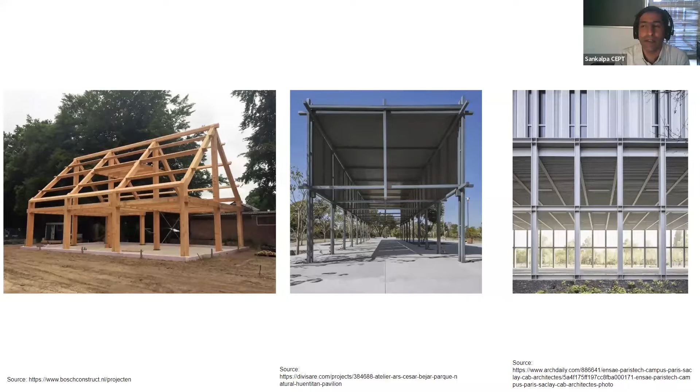The first case, of course, you can see. The second and third case is an articulation of a similar system. It is sort of an orthogonal form, but the way it is articulated is slightly different. So if you look at the one in between, the way it is treated is almost like how timber was treated earlier. And the right side is where profile sections in steel are used, one of the better ways in which profile sections are used. I've put the left one so you can compare it with the in-between box section.

So you see that there is some way that there is an intermixing of knowledge which is continuous. It is not that bamboo has not been used since ages, it has been used since ages. Some of the ways in which bamboo has been used, timber got into that, and then from timber it got into steel.

So I would say that it is an intermixing of things, but somewhere in history, a lot of impetus was put into timber, because it is easier to work with timber compared to bamboo. And if you have worked with bamboo, you'll realize that every joinery is new, every bamboo is new, which is different from a standardized section of timber or steel. So that's the comparison you will have to put in perspective.

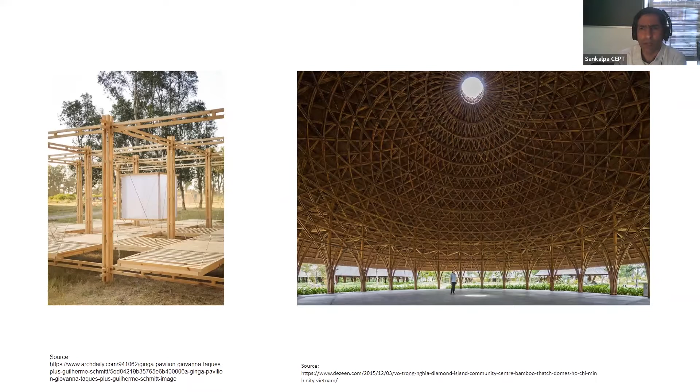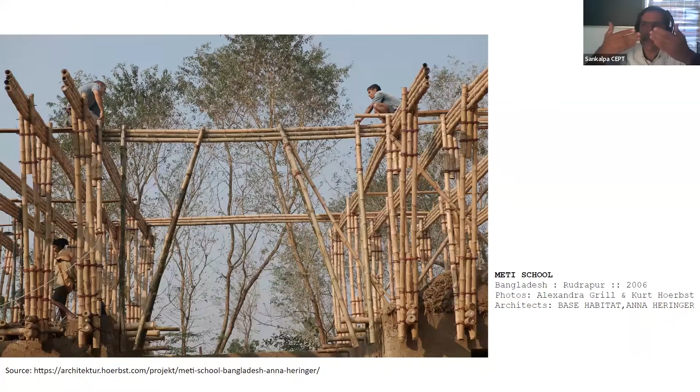So when it works like a deep section, what you need to observe is that in spite of the fact that it is simply supporting, there are other diagonal members which are working, and they are working because they are trying to reduce the span of the bamboo, propping it and shortening the load path. And you will find this constantly, because one of the observations with bamboo has been its deflection problem over a period of time. So these are some examples of it.

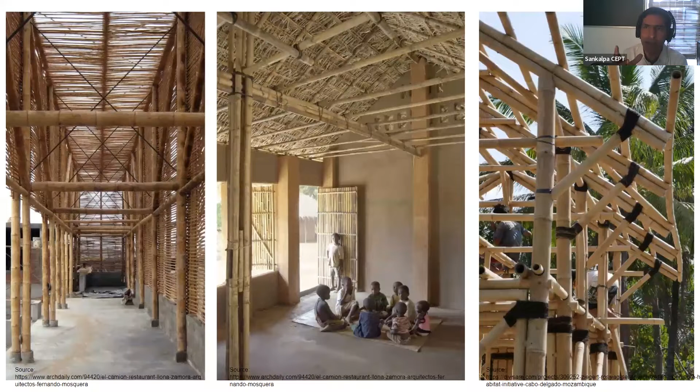So if you look at it on the left, and then on the right, and then the third one, you will find there is a difference. The one in between is the way in which most modern construction is being done now, where the beams are passed over the bamboos, and then there is either an intermediate cleat or some support on which the bamboo rests. On the right one is somewhere in between, where there is a fish mouth joint that is being used.

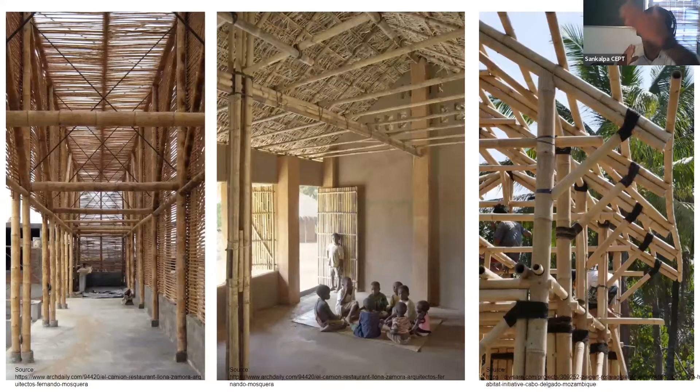If you look here, when there is an intermediate member being used, one vertical bamboo is trying to support your beam, another bamboo that goes up is trying to support your roof. So each bamboo independently does its job, and you are customizing bamboo to support the other member on top. If you go to the left, you don't want to customize bamboo by constantly making a new fish mouth joint, so it's easier to do it by having a joinery on the left.

There are some standardization attempts that have been done across the world. This is Latin America, and because it has a very good species which is almost straight, it's Guadua. Look at the saddle detail that has been worked, and the washer detail that has been worked, which has been standardized.

If you have to further standardize, I'm sure if they hadn't done it already they would have thought about it. Based on different diameters of the bamboo, you can have 2 or 3 ranges of washer. Similarly, you can have 3-4 ranges of saddle. Once you do it, it's possible to keep standardizing, because you just have to connect your fastener and move ahead. This whole story of trying to constantly customize goes away.

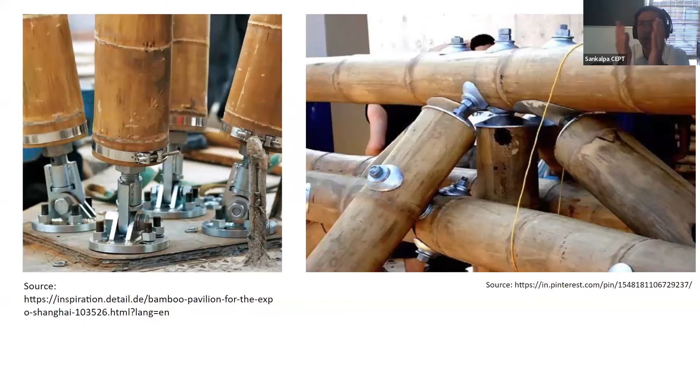So this is somewhere an in-between stage for bamboo. You'll find some more examples, again bundled but customized, as you see here on top. So these are some of the things which have happened.

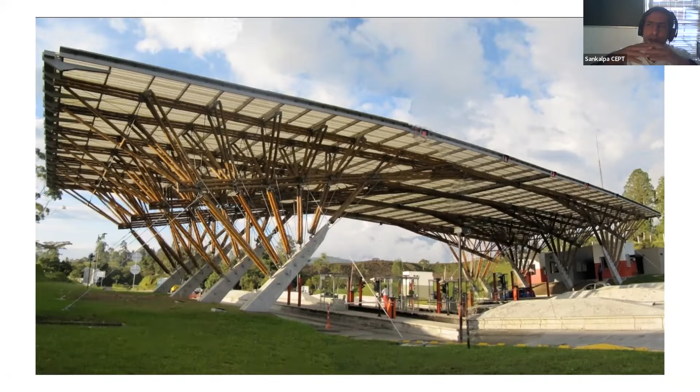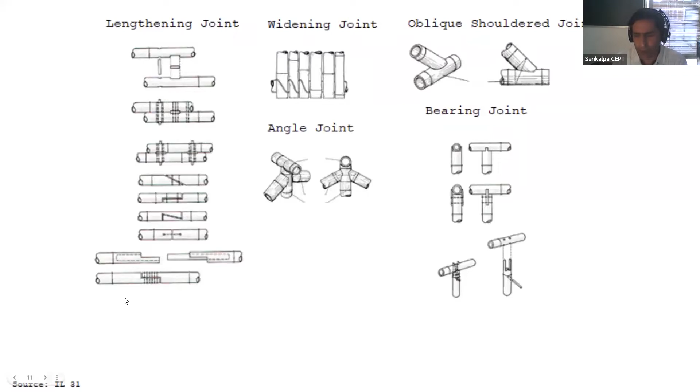Now the smarter way is to put all the joinery together in timber and in bamboo, and when you compare it with steel, you may see the difference. I'll not get into it because I'll explain through images anyway, but this is a smarter way to deal with it.

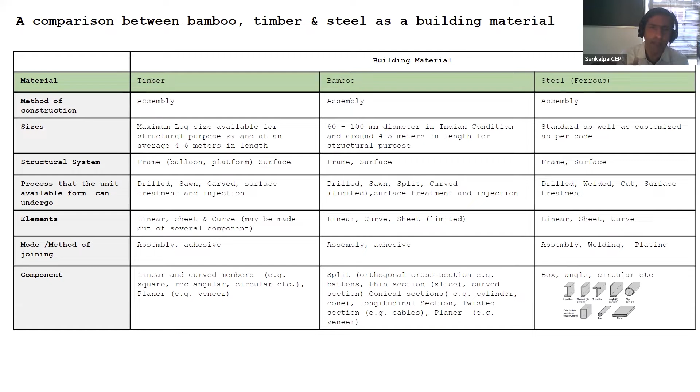If you want to compare it, you can put all 3 materials in assembly, and compare the sizes, the structural systems, what kind of elements you get, what are the modes of joining—which is important again—and what are the components being used.

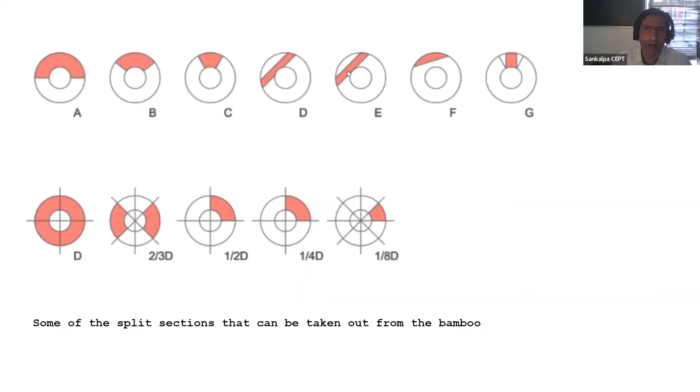I'll touch upon quickly what is the relationship between morphology and its detailing, since I've already explained this. You find that bamboos are different in sizes—you get hollow and solid sections, and you can also get split sections. There are various forms of bamboo that you can remove from. All the red marking shows the way you can remove bamboo and create various sections from it.

The experiments we keep doing are in terms of trying to find out the possibility with sections, particularly with splits, because in India one possibility we have is, since we don't get very uniform bamboo, we can certainly standardize the split sections.

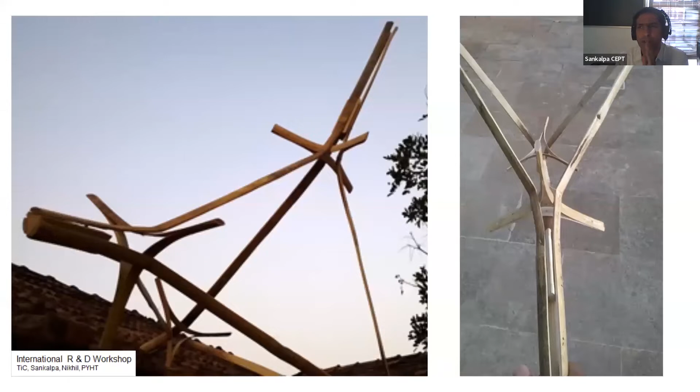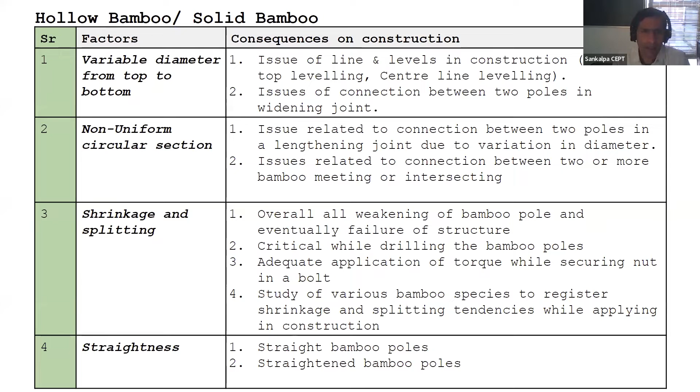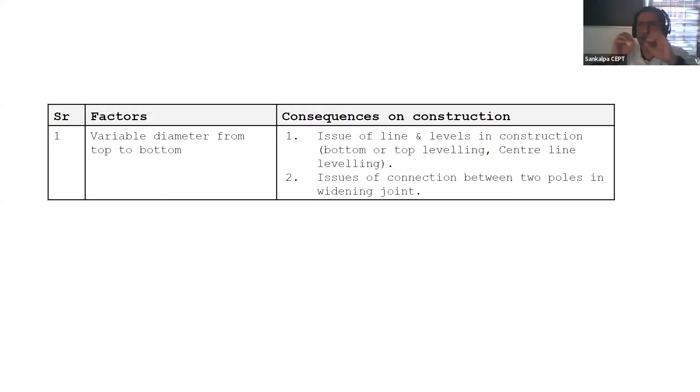Four challenges you'll generally find in bamboos would be variable diameter from top to bottom, non-uniform circular section, shrinkage, splitting, and straightness. With variable diameter from top to bottom, one problem is connection, but the other problem you'll always find is level difference, because you always have to work with lines and levels—that's where the challenge will be.

For example, if you look at the center line I've sketched, because it's an elongated cone, the upper one is parallel and the lower one is not parallel. You'll find that on the left, on the upper one, there is less gap between the bamboo, and on the right there is more gap. If you alternate it, you may be able to find an equal distance.

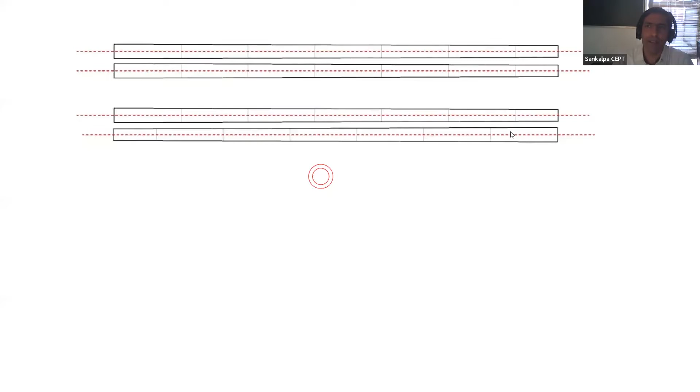So what will happen is, when you start creating a joint which is on the side, and start creating those sections, you will start seeing these gaps. Those are the aesthetics you'll have to deal with when working with bamboo. So either you select the same uniform section, or you deal with it creatively, or accept it the way it is. And that is going to affect the way in which you connect the bamboo, if the bamboo is somewhere in between.

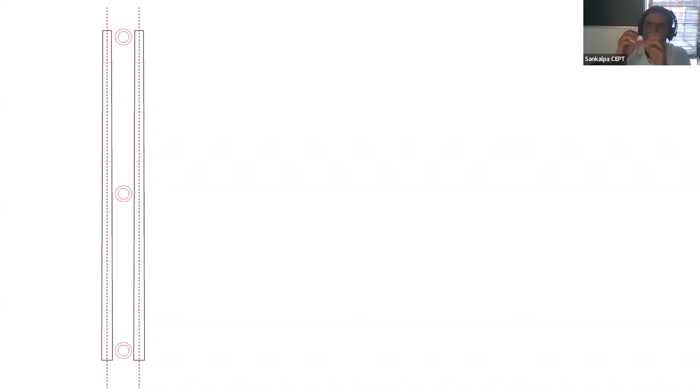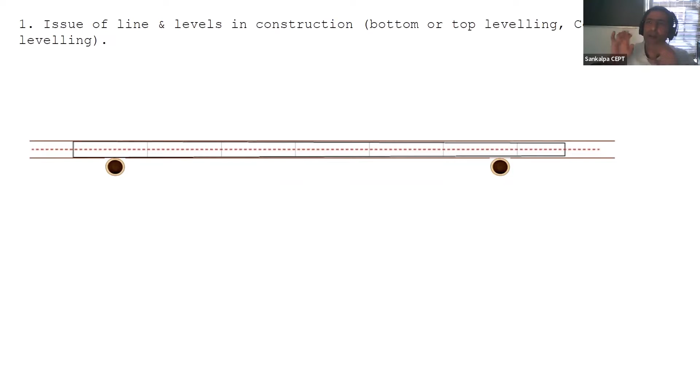Because it's not a uniform section, geometrically you will not be able to see the straightness. Similarly, when there is a line and level, I have drawn this line and level parallel, but it's not parallel in reality. Once you start looking at plumb and all of those, you will see there is a level difference. So you will have to constantly figure out how to adjust those line and level differences.

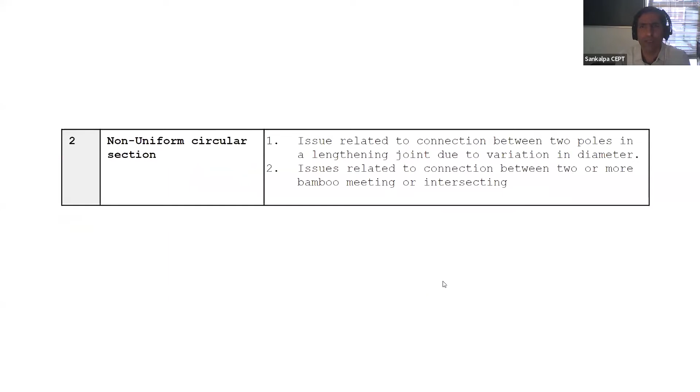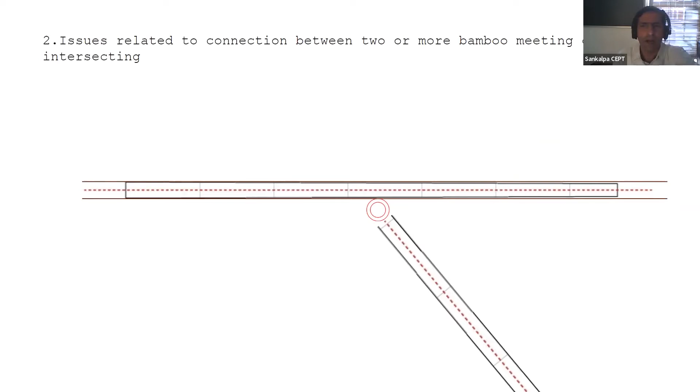Similarly, when you are trying to do a lengthening joint, because you are trying to join two things together, you will see there is a difference in the gap between the two from top to bottom. Non-uniform section, what is the challenge? You cannot have the fish mouth joint the same. If you have cut at one point, that would be different because the point is different. So that's another challenge, showing different geometrical conditions - the fact of the matter is it will be different.

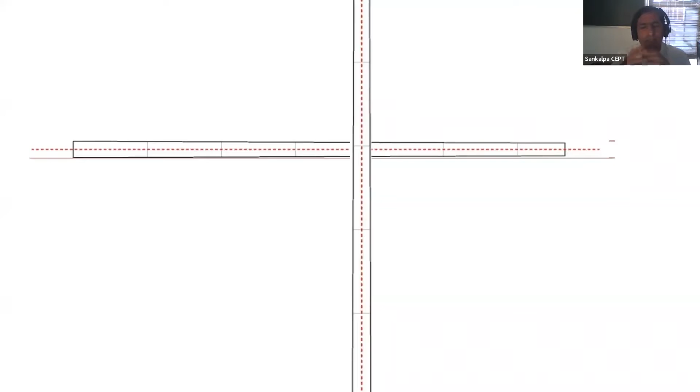So you have to figure out these challenges, how will you deal with it? What people sometimes do is overlap it rather than fight with it, and when you overlap, it's a better detail. Why? Because bamboo is hollow and bamboo is a linear fiber. The moment you start cutting the bamboo perpendicular, you are weakening the section. You cannot treat a bamboo joint the same way as a timber joint with a lap joint, because that will weaken the section. I'm talking from an architecture point of view - in furniture, you can do some of these things.

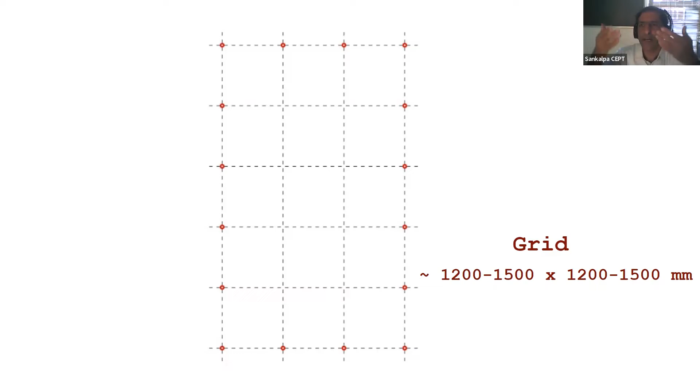Now in India, generally this grid I have drawn for hollow bamboo is about 7 to 12 centimeters. If you create posts center to center in India, your grid would be 1.2 to 1.5 meters. The moment your grid becomes 3 meters or 2.4 meters, there has to be a compensatory action in terms of depth, etc., or a change in the spanning form. Because if you don't, over a period of time it will start sagging - there will be a deflection observed in the beam.

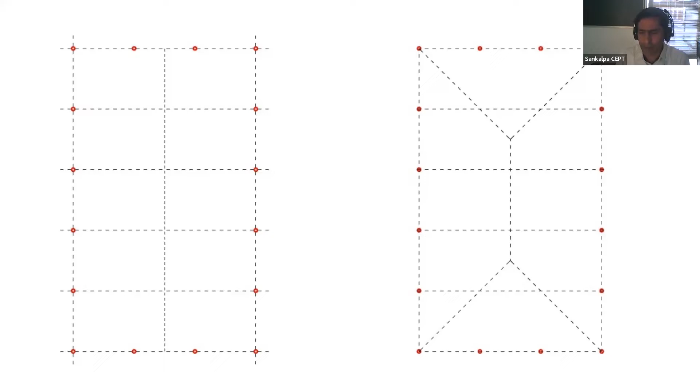That's what becomes important. The other thing is you'll have to look at the corner conditions, and sometimes look at conditions where it's difficult to have a square plan, because with these kinds of roofs, the junctions become complicated. You can creatively resolve it, but you need to know about it.

In short, because you cannot work with the outer bamboo surface, you always have to work with the center line and maintain it. The other thing you need to know is that if you try to find the center of gravity in a uniform steel section, timber section, and bamboo section, you will find the maximum variation in CG will be in bamboo, where the geometrical center and center of gravity will not match. In timber it will be very little, which means whenever making a structure, you have to realize the loading is not symmetrical. So you will have to select bamboo with similar CG if you are sensitive to how structural forces will work, or you have to over-design.

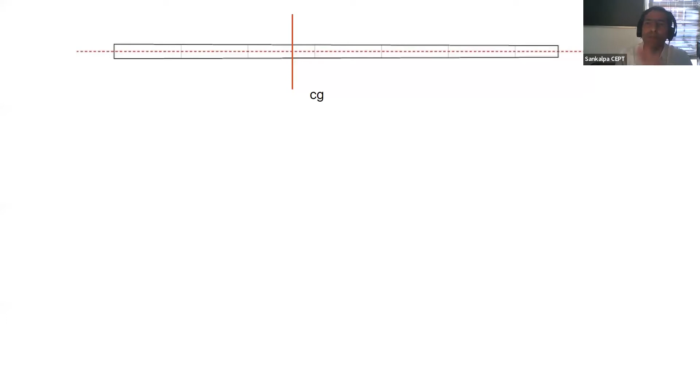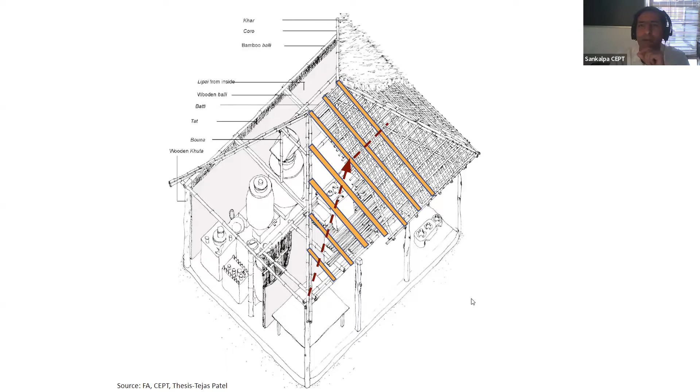Ideally, all the posts you see should have their center where the CG would lie, as happens generally with timber. But in bamboo, that does not happen. If you have not over-designed, these members will experience eccentricity over time, and therefore there will be torsion in the plane, because the CG does not follow the geometrical line as you can see here. So these are the structural challenges you will face.

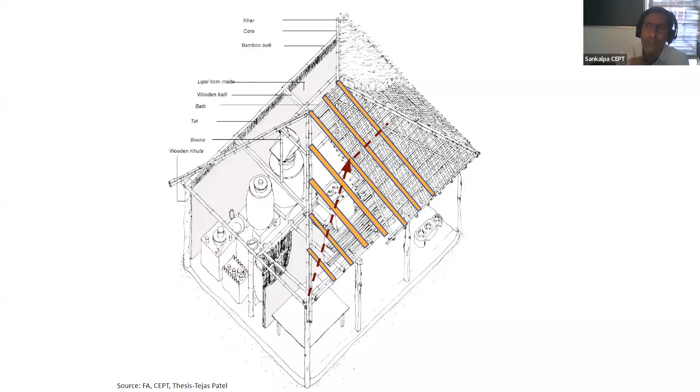Of course, if you over-design it, it will work, but at least you need to know some of these things.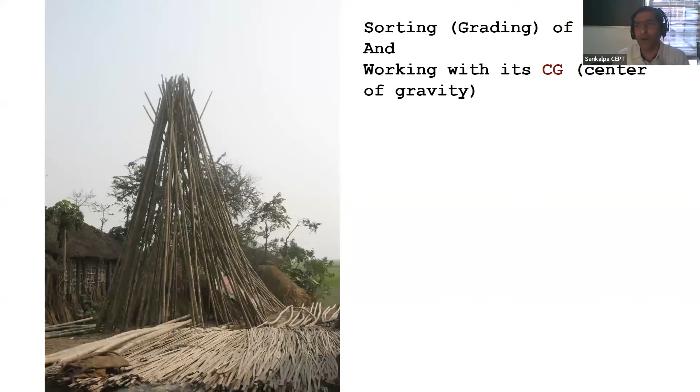Whenever you're trying to add and lengthen it, you'll have to work it out so there is some degree of uniformity. So those are the site-level challenges you'll have to deal with in bamboo.

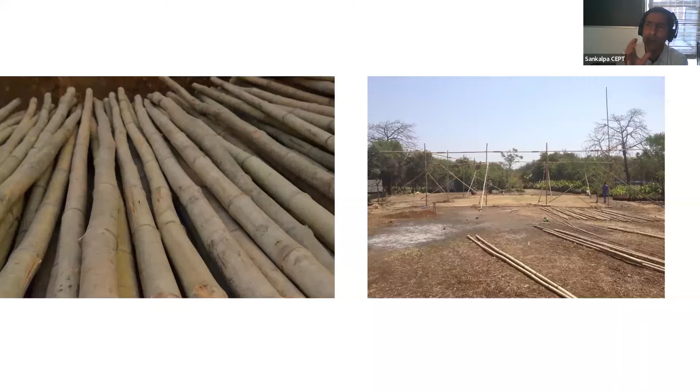Some images. The other problem, of course, are the splits in bamboo. As far as I know - Neelam ma'am can correct me - still a lot of work needs to be done to find out why splitting happens in bamboo. Some conditions are related to environment, but so far, scientifically, we have not been able to fully grapple with this question of splitting.

The straightness of the bamboo - if you have to select 8 feet bamboo, you will get bamboo which are not straight. So you'll have to use thread and sort it out. When you sort it out and cut 8 feet of that straight bamboo, you also have to understand that the culm thickness of the bamboo has to be the same. It's not only the external diameter which is important.

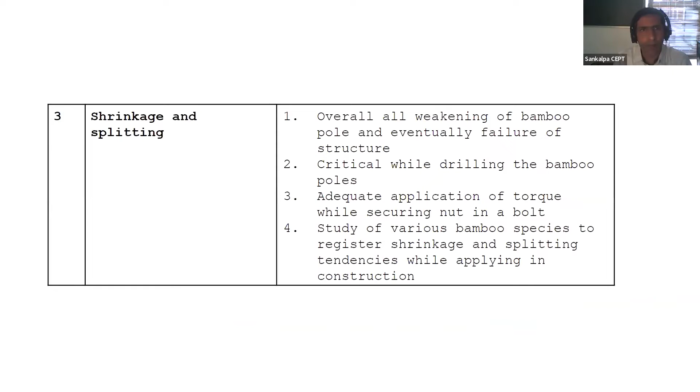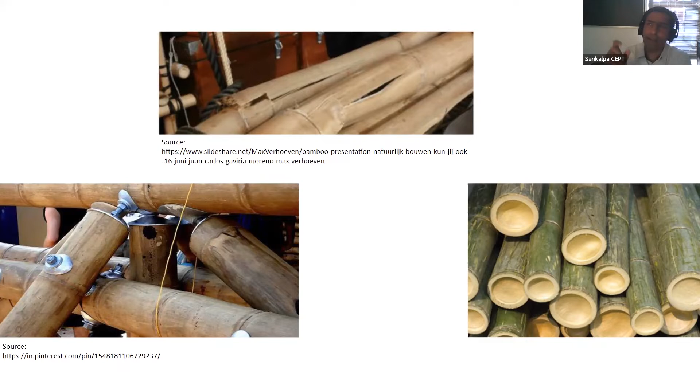Shrinkage and splitting, I've already told you. Now I wanted to mention this - I think it's Simón Vélez, on the left. If you look at this washer, bamboo is a linear fiber. If you apply more torque to tighten the nut, after some time there will be a crack because you have over-applied the torque. When you use this kind of washer, on the counter side, when you apply torque, it tries to hold the fibers together. That is why in traditional construction, you'll find people tie it, because you have to hold the bamboo from splitting.

Straightness, I've already talked about, but if you want to straighten it, you can use some heat-based treatment to straighten it.

Now, as bamboo is sort of an elongated cone, whenever you cut a split, that also will not be a uniform section. The diameter will be more at one end and less at the other, so it will be tapered. Later on you can grind and make it uniform, but you have to know these things, and it will have the same problem of leveling as the full bamboo, but it is easier to standardize.

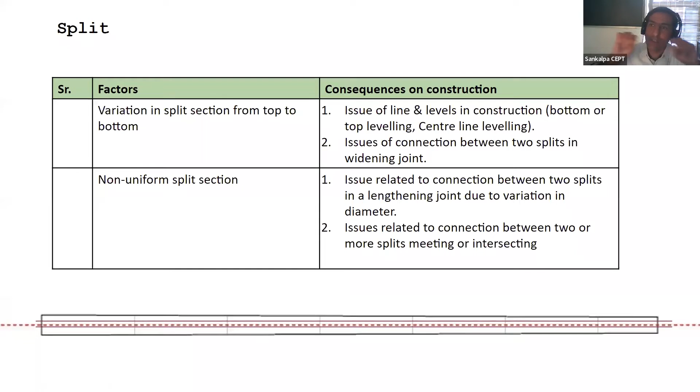To give you the logic, in basketry, when you are weaving, you're basically weaving slats. Slats are essentially a standardization of split bamboo - you've split it and reduced the section so the tolerance is enough, or you can play with the tolerance, which is enough to get a nice basketry where you will not see the uniform section deviation. But in case of making a structure, you will be able to see it, so you'll have to figure out how to deal with it.

So these are some of the sections you can see out of the split. You will have to get these split sections.

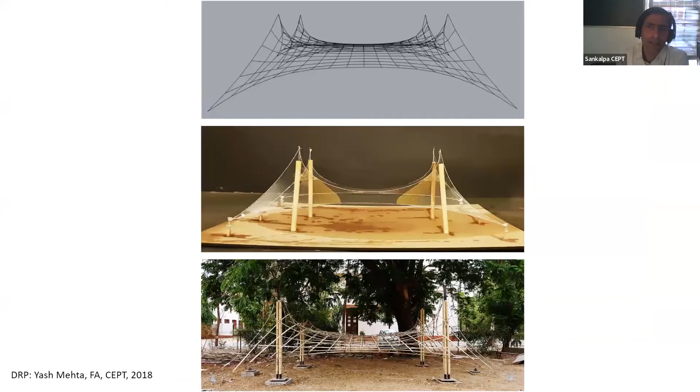These are some examples of domes, etc., that you can make out of split sections. There are examples of standardization of split sections which we can easily get into. This is some of the work that was done by us, including our students at CEPT.

This is the workshop where we used split bamboo. I only have one image, maybe later I can add more. If you look at the end condition where it has to be connected, the split bamboos are connected by overlapping, and then it ends up into a full bamboo. Because if you connect through split bamboo, you have to bundle it too much, since it's very difficult to have those end connections. So the way we resolved it is to distribute the stress over a large area first, and then convert it into a full bamboo and then connect it.

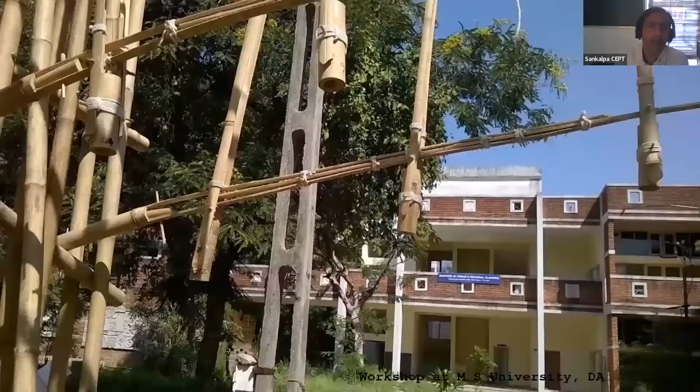Generally you'll find bamboo systems under pure compression, systems under tension. So the system which I showed you was a system under tension, and a system under bending, which is your frame structure. I've already talked about it.

It's difficult to resolve a sort of square plan. You can creatively resolve it, but there's too much of a member coming here. And bamboo is not like timber that you can treat the same way. It is a hollow member, so you cannot have the same joinery as you would with timber.

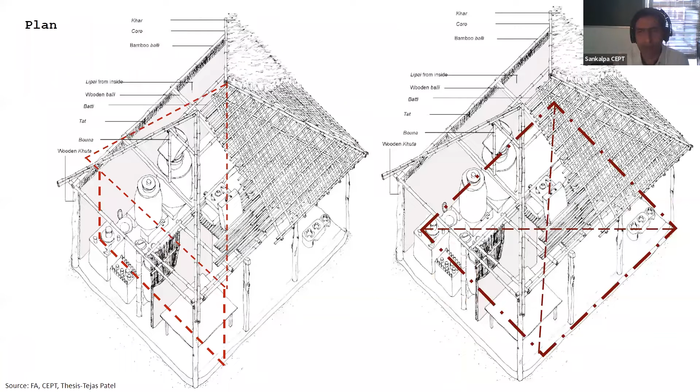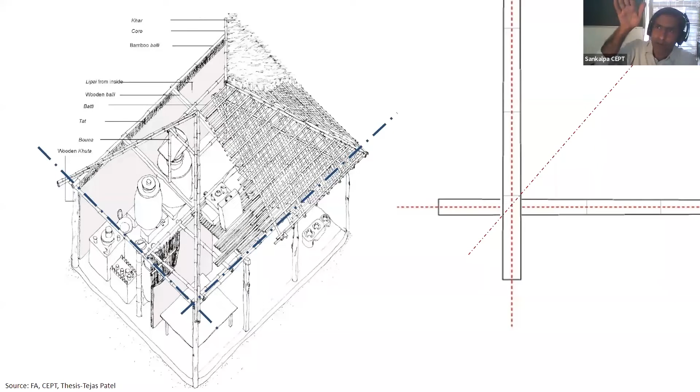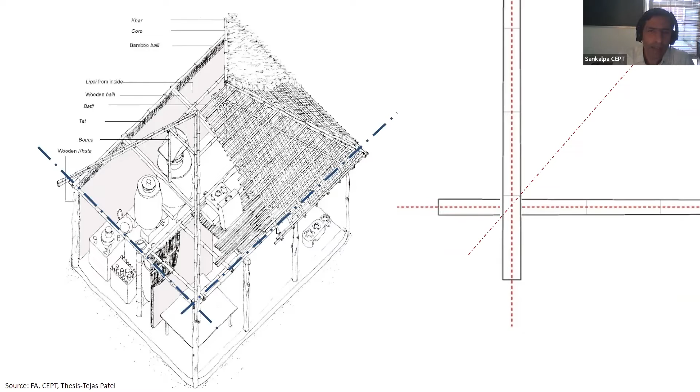The other thing you have to understand is the corner condition in these kinds of structures. You cannot make a split or a lap joint at the corner. So you have to always create a joint with one up, one beam up, and one beam below. When this happens in this kind of roofing, you'll find a problem at the corner, because you'll have a level difference—one kind of slope here, another kind of slope there. So there will be a slope difference between the two sides. In order to compensate, here are solutions: you either need a spacer here, or an extra bamboo here, to have the same level in both directions.

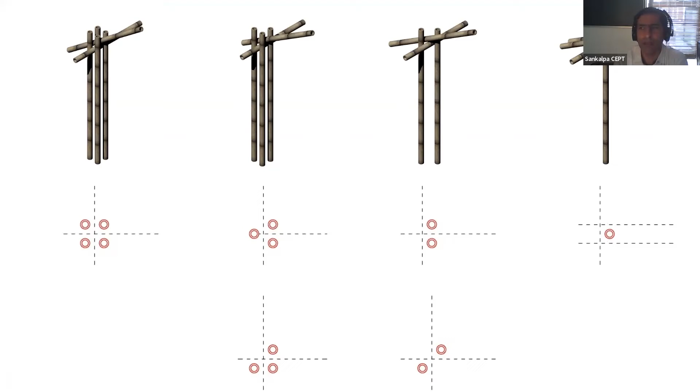Then there are corner conditions which you can see and creatively play around with. I've shown you some corner conditions, and it depends on the kind of spanning you're working with. Here are some examples of that.

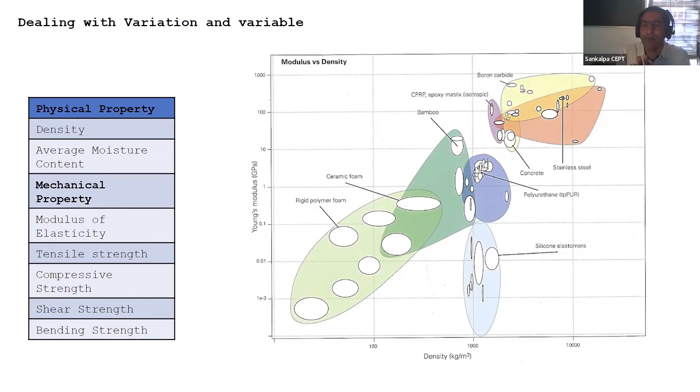Now, if you look here, the graph is on density and Young's modulus. The density of steel is more than that of bamboo—bamboo is here and steel is here. But if you look at the Young's modulus, it is comparable. The problem is that because bamboo is very weak in shear, its fiber is very weak in the perpendicular direction, the joineries are not able to take the full potential of its tensile strength, because it fails before that. So our job is to make a joinery in a way so that shear failure is avoided, so we can maximize the potential use of its tensile strength.

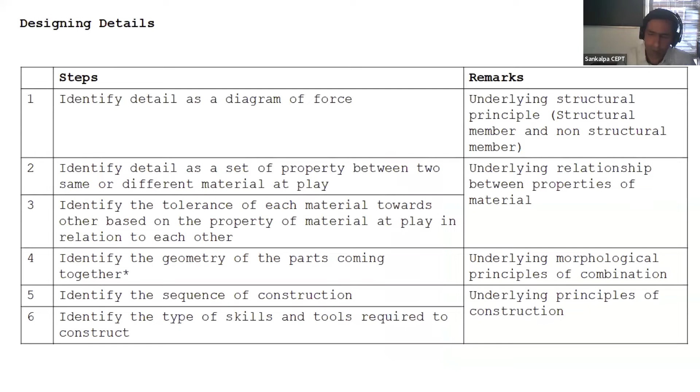What are the ways joinery and junctions get resolved? In India, we generally use species like Balcooa, Stocksii, Nutans, Strictus, Tulda, and others. I don't think Hamiltonii is among them, but some other species are there, and Neelaman can talk more on that. But I won't get into the detailing again, since I've already covered it earlier.

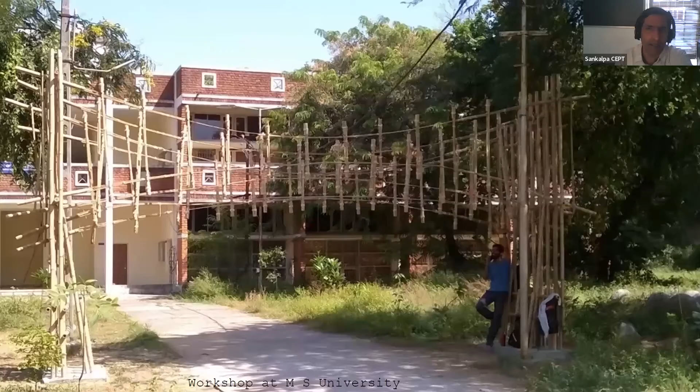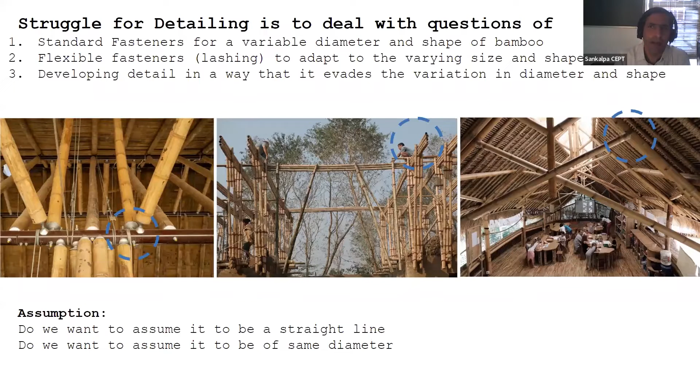I'll show you some other examples. This is tensile one I was trying to show you. I've already talked about the struggle with detailing: variable diameters, splitting, and if you have to adapt to diameter, then you'll have to think about adaptable fasteners.

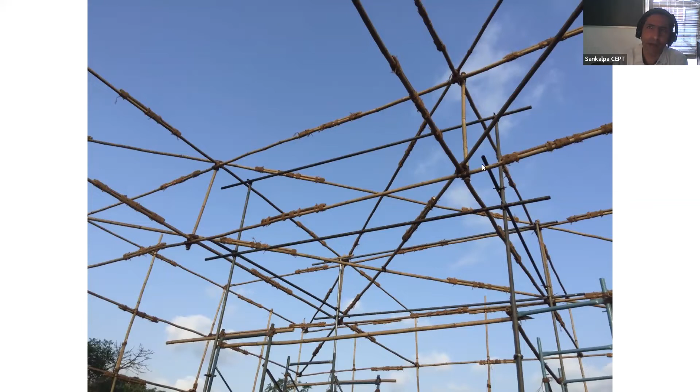Some examples are of this kind, where you see two kinds of systems. One is lashing, another is pin, which is traditional in order to make joints and junctions, used in some houses. If you have to create a lengthening joint, a better way is to have an extra bamboo and do it, rather than get into the way timber is done.

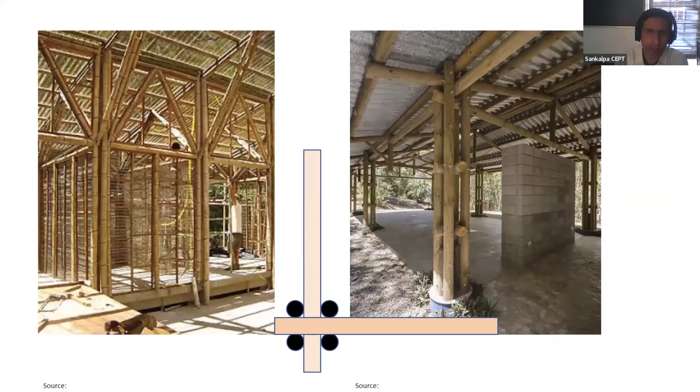Lashing I have already explained to you before. Bundling, I have said, why do people use bundling? This is patented. Again, this is one example of standardization. This is another example of standardization. This I'm sure should have been patented by now.

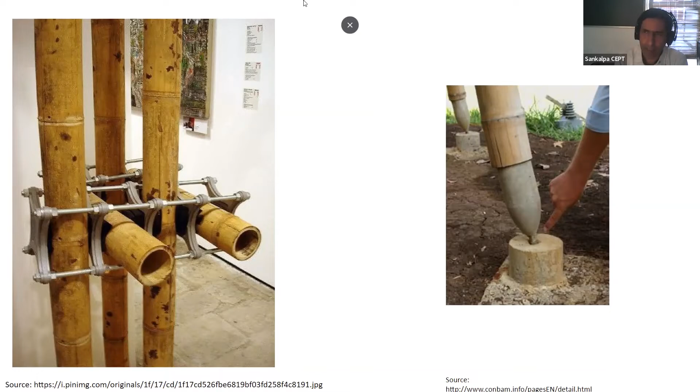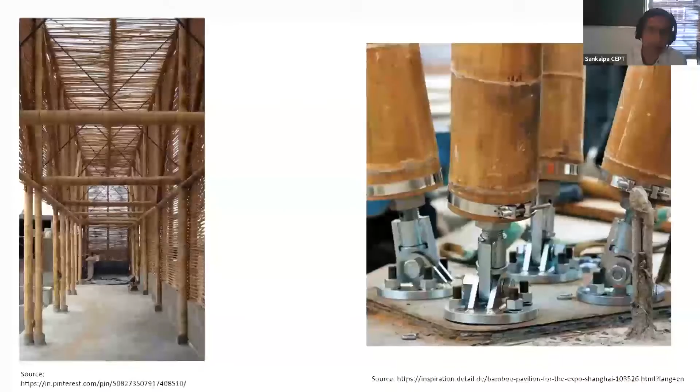Again, trying not to fight with the bamboo, but trying to touch with one line and then get and trying to connect with other bamboo. Now you can agree, disagree is a different matter. If you look at the bottom, these are the ways in which we create uniform spacing. These are some of the ways in which people have worked across the world.

This is the work which we just did, where we have tried to standardize the fasteners in bamboo. This is a bus stop which we did for a iiiD workshop, and this is soon to be put in Hyderabad Ring Road, I think, as one of the demonstrations of use of bamboo, or a green bus stop you may call it. This has already been accepted or confirmed, even the place has been confirmed by the government.

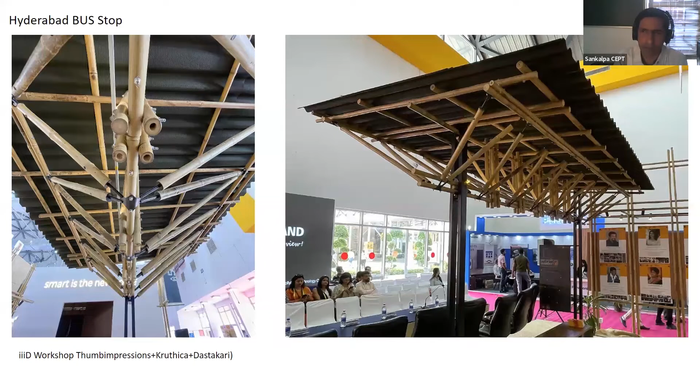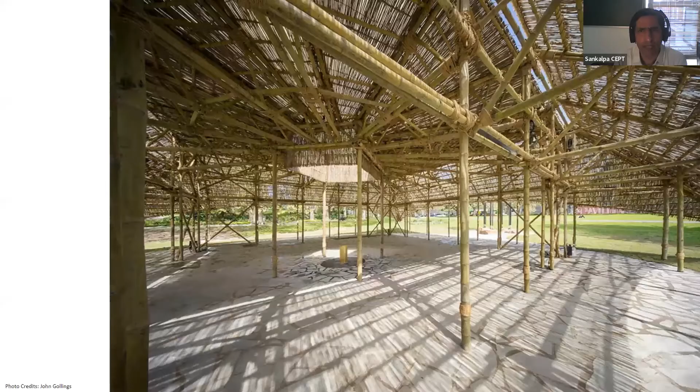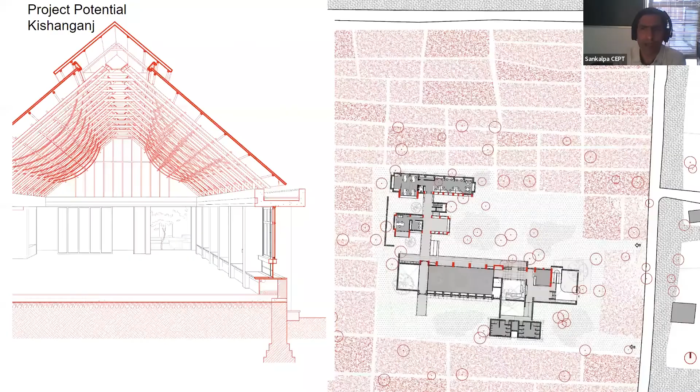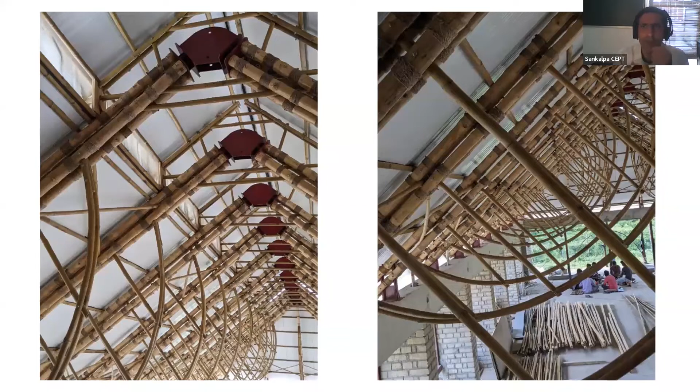Another articulation of bamboo. Recently, we have also gotten into articulations of this kind. This is in Bihar, in the eastern part of Bihar, where we are doing the NGO campus. Again, we are looking at an expressive dimension of what happens when hollow and solid bamboo come together, and what kind of spanning system we can get.

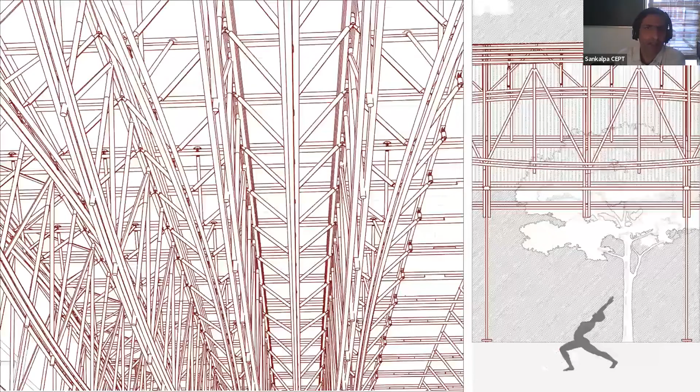This is a large span structure, I think currently one of the largest in India. This is a Yogshala pavilion, which we designed and executed, which uses a mix of compression and bending based systems. So this is the structure. This one is in bending, and this one is in compression.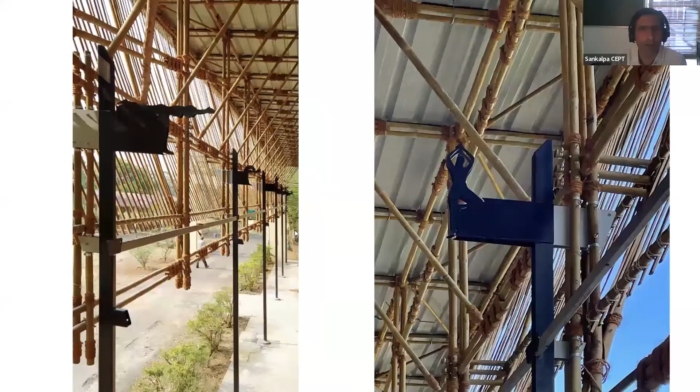So the bending one, the truss, the top chord is connected to the compression member, and that is there to avoid creep. So this works together as a system, and it's around 78 feet span, which would be around 24 meters. Again, an attempt to standardize the joineries, which you can see in some of the expressive dimensions of it, shown here in images.

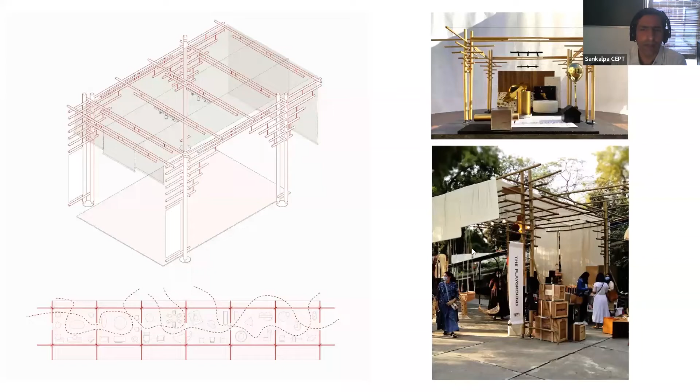Some of the other work that we did: this is a temporary pavilion which we did with workshopping for Raw Collaborative. Thank you. If you have any questions, please feel free.

Yeah, thanks, Sankalpa. That was a really nice presentation, and I think that's one area that you have touched. I'm really happy that somebody is working on the joints in a very scientific manner, and I think it's really encouraging. I think you're working with Manu Narendran, I suppose, the structural engineer, which many architects don't have, in fact, I do not have a very good structural engineer with me to work even now.

We would want to really work together. I think that is one area which you have touched and you're working on, and it really needs a lot of work. In fact, standardization of joints and also testing of joints has remained a very gray area, and that has actually limited the creativity of architects and people, because they do something and they are not aware whether it's going to work or not.

I'm very sure at CEPT campus, with all the prestigious institutions, facilities, and people around, we will have a lot of work from there with you at the helm of affairs in bamboo work.